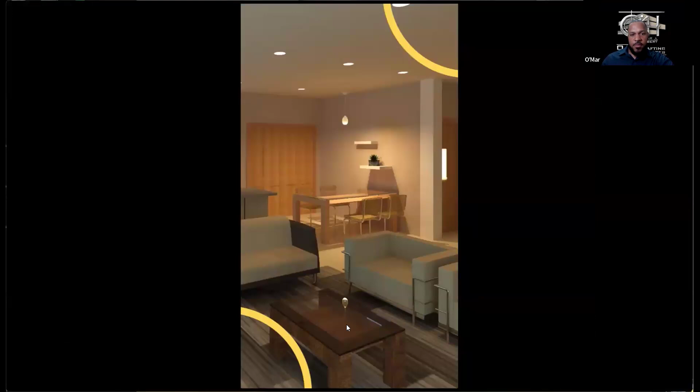All right, so I'm going to be bringing your vision to life the right way. Great design isn't just about looks. It's a carefully planned process that balances creativity, budget, and technical precision.

We start with the OAH checklist for successful building design, prioritizing your must-haves while ensuring your vision is practical. Sometimes dream designs need adjustments to fit the budget, but quality solutions are always possible.

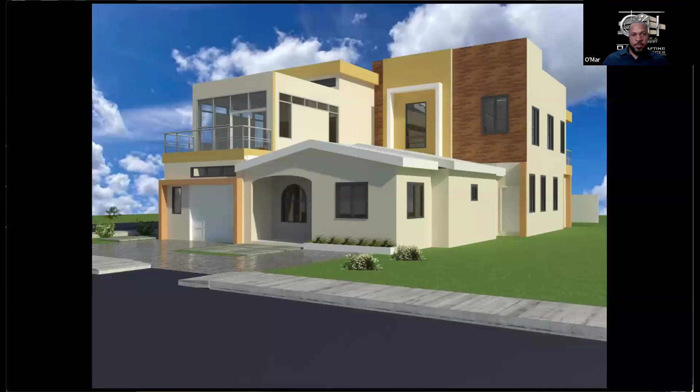A proper architectural plan isn't just a drawing. It's a detailed guide that contractors follow to build safely and efficiently. We consider structural integrity, climate resilience, and international standards, ensuring your house is both stunning and durable.

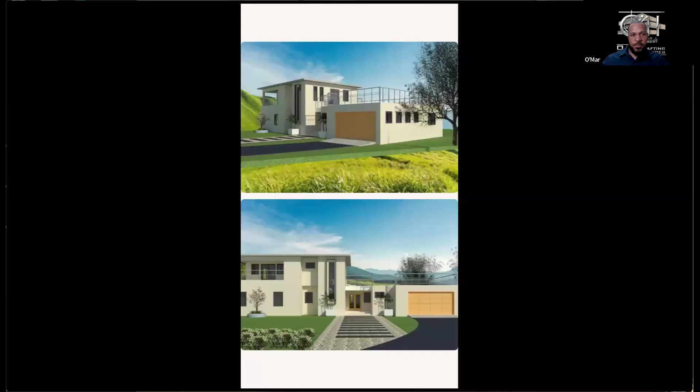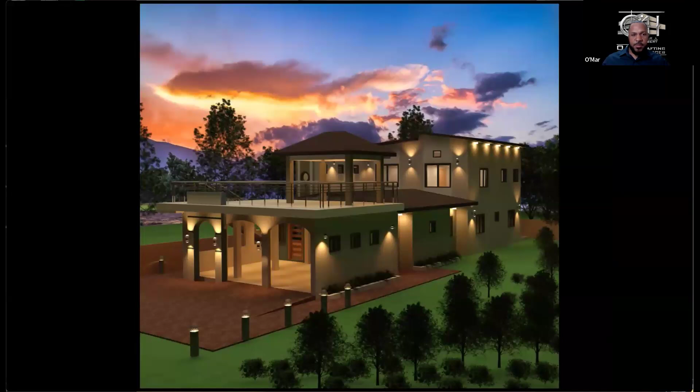This level of detail takes time, and for high-end custom designs, expect a higher investment, because quality, experience, and unique solutions come at a price. At the end of the day, our goal is simple: to design a space that works for you, functional, beautiful, and built to last, from vision to legacy.

All right, so that was a short video giving a synopsis of how projects are priced and the general process involved in getting this done. So at the moment, I'll be sharing my screen to go through previous projects that were designed and approved by the Municipal Council.

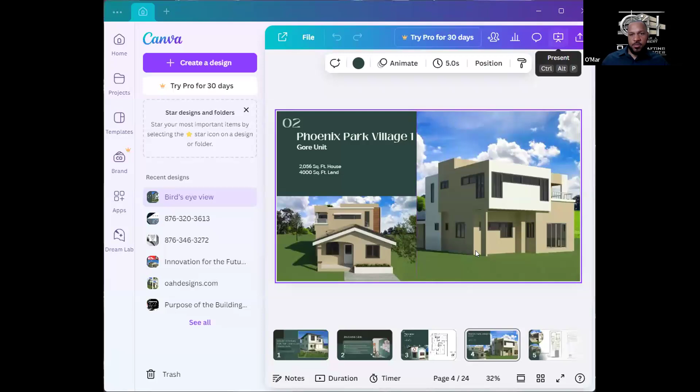House designs for the Jamaican landscape, Homebuyers Bootcamp 2025. So the introduction: we'll be looking at Jamaica's terrain types, flat land, significantly sloped or gently sloped, whether it's sloping upward or towards another direction.

So we will begin first with a starter design for various terrain types. We'll be showing small lots, and as we progress, greater lots, and show you how you can enlarge or expand on space, whether going up another floor to maximize space on a small land. We'll also show soil type requirements for special foundations and how to maximize small lots, and finally the rigor required for slope terrains.

So basically we will start with a very small lot. This lot is a Portmore Matalon unit, where the original unit is indicated in shaded lines. This client wanted an additional bedroom, living space, and dining. So a section of the building was initially added onto, with a few modifications in terms of exit and access to different rooms within the house.

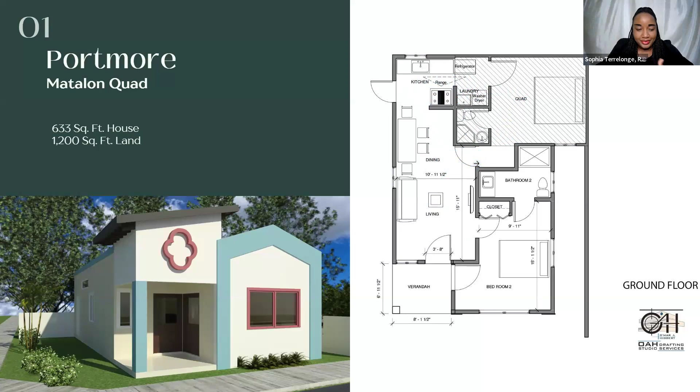I'll move on to the second of 8 projects. This project is in Phoenix Park Village 1, that's the original Phoenix Park there around by Dunbeholden in Portmore. It's a GORE unit, so the size of the addition amounts to 2,056 square feet, and the lot size is 4,000 square feet.

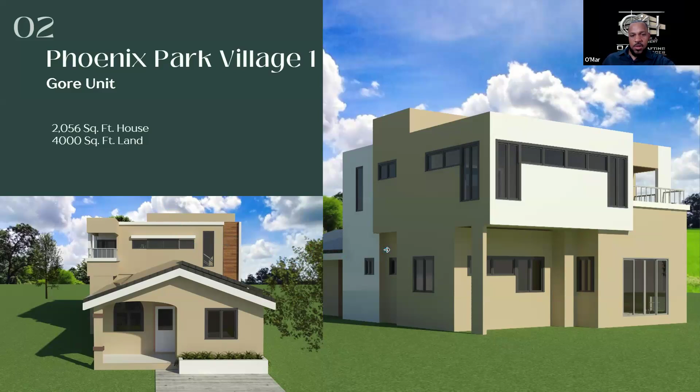This client wanted something different. They're not typical, they don't just go for any style because they just want to add - they want flair, they want a design, and they want comfort for a growing family. So with most designs, I recommend using a simple pattern, whether rectangular or square, and then slightly adjusting areas to bring a little flair to the appearance.

So this is the floor layout. The existing here is shaded. They did some modifications to the kitchen layout since they were adding the living space to the back.

As you enter into the dining area, they have a large kitchen with a dishwasher. Refrigerator is here, and the sink looks out through a window.

In terms of other modifications, this is basically what is existing on the bedroom side. The unit occupies 2 bedrooms, and the need for the addition required 2 bedrooms. So this is one of the 2.

Moving from here, we have the pantry. The pantry has a sink and cupboards along with counter and a tall standing cabinet. In this area that the cursor is indicating, they plan to put a deep freeze. So the spaces are allocated for expansion.

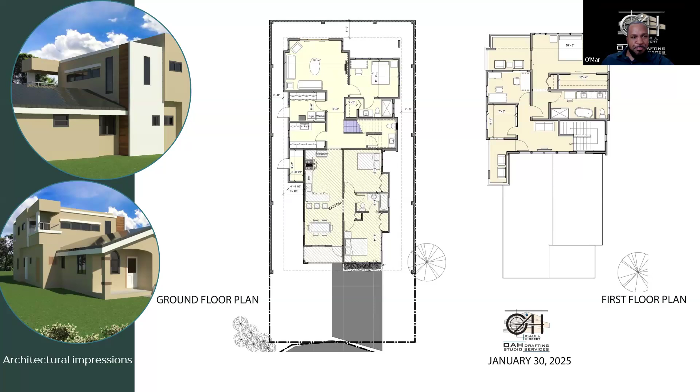Sure, no problem. So cladding is referred to as even the tiles, the wall tiles, or you see those materials that look like wood or they look like slate stone. Those are referred to as cladding. All right.

So this is another project. This was done from around 2022. This is the New Harbor Village, Old Harbor. And the size of the extension is 1,799 square feet. While the lot size, when I say the lot size, that's the land, the size of the property is 4,003 square feet.

So what was designed here is to have a trellis above the carport where 2 vehicles can park. And just to mention, the municipal council charges for every covered space. So if you're intending to use a trellis space, even if you're going to have it semi-open as this is, you will be charged for what is a semi-covered space. So this is the front appearance, the curb appeal.

Here's the use also again of cladding. And this cladding is to resemble shale stone. They wanted to also be able to access the top of their roof for entertaining. And for this kind of design to be done, the municipal council only requires a stairwell. So if the community standard is that it's 2 levels, as I know that most of these scheme developments are, the stipulation on the title would say that the building should only go up to 2 levels.

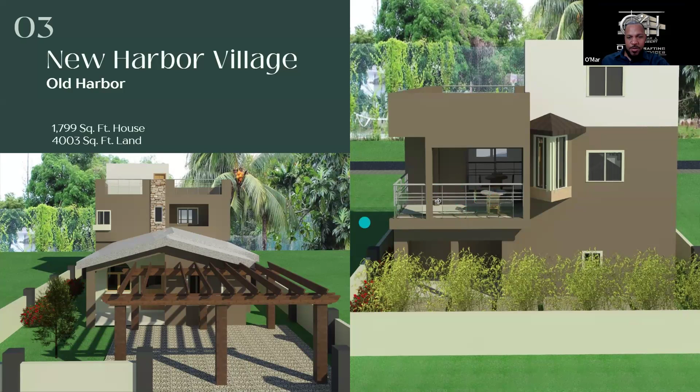So this is what the inside looks like. This is a concept of the kitchen space. They didn't want to entirely remove the wall because of structural integrity, and they didn't want to compromise that integrity. So small spaces were opened into the wall to allow them to see through to the front of the house.

Now let's go through the floor plan. So as usual, this is the existing section. And then the addition, they created an opening here for this bathroom from this bedroom. They have a young child who is going to school. So there was a desk in terms of spatial layout, desk and chair.

And we move into the kitchen. So the family loves to eat at home, and the female partner requested a large, comfortable kitchen for hosting. Now, next to the kitchen is a walk-in pantry, and then the laundry is next to that. So another idea that I repeat, where the cupboards are suited for a 3-member family. One here, and another one there. Laundry, tub here, washer, and dryer.

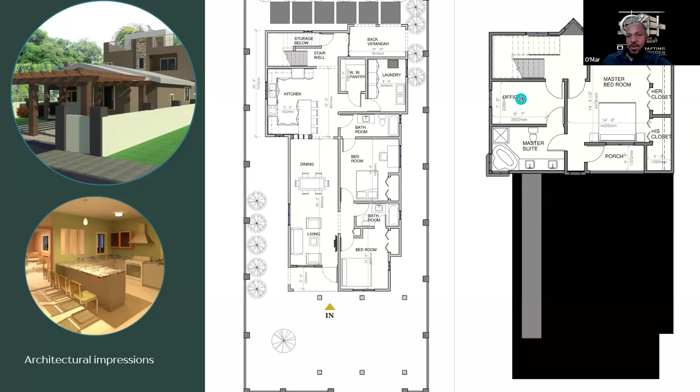All right. So I move on to the next project. So this project is in Mukiwaki Bull Bay. The design is built from scratch. There was no existing structure. So the structure is built from ground up, and the size of it is 2,172 square feet, and the land is about 10,000 square feet.

So this is near a beach, and because it's near to the beach, they wanted to have a beachish kind of vibe to the design, and you can see that simple lines are the idea of this design. Right. And they maximize on ventilation and light by using large windows and high ceiling. So this window you're looking at is a 4x4, which is a typical size window. And then on the top, these are 2x2, where all can be accessed or opened.

Do you remember the height of those walls? They're like 10 feet high? A little over 10 feet, around 10'6". Is there a special name for those windows at the top that go across almost the length of the wall? Well, these are your typical sliding or casement window. Okay. So you will slide it left or right. So they're fully functional? Yes, functional, operable. Yes, they can open.

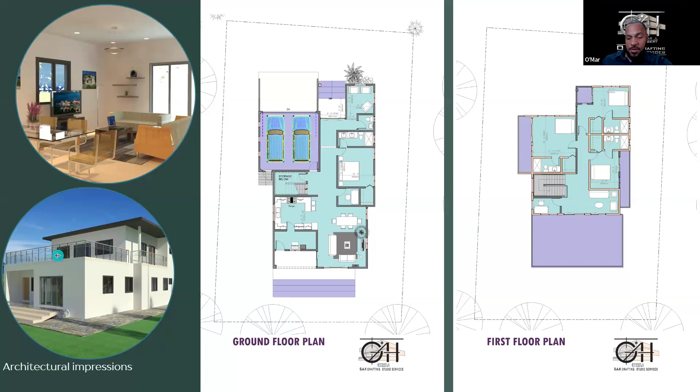One bedroom here, another here, and each have their own bathroom and balcony with a closet. That was the idea or the concept in this design. Each bedroom must have their own bathroom and closet with a balcony for looking out. And here is another lounge space, office, and large windows and a sliding door to look out, as you can see in this 3D render or architectural impression of what the final product can look like. So these are ideas that you can bear in mind when you're getting your design done.

So this project in Longville Park, May Pen, Clarendon has the level of the house higher than the road level and it slopes up onto the site. So with this design, steps were created to make an easy ascent into the property, and they intend to have a driveway which is open to the elements. And this was done because the space isn't all that big. They wanted room space more than to have a car taking up space, which possibly is not going to have any negative impact on it other than the sun.

So they asked for flares in the roof, different angles, and a large terrace for entertaining, as you can see here. So this is the lot. This line that goes around, that's the lot space. These are the steps that take you from the driveway or the road level up onto the property. So this is originally a 2-bed, single bathroom unit.

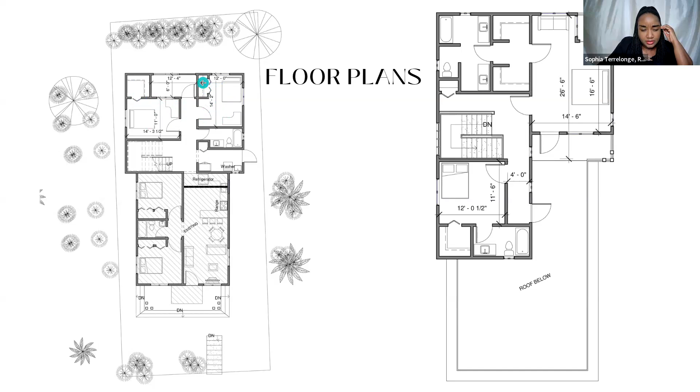So each bedroom has a study desk and chair, just to show the layout of the room. So this is a walk-in closet. The bedroom is 11 by 14, which is a typically good size. Same for here, this is a 14 by 12. Can an 11 by 14 hold a queen size? Yes, it can. Okay.

Bathroom that is shared between the two bedrooms and the back patio. Similar to one of the designs I mentioned, the entire space was intended to be for the heads of the house. But one of the children, actually the last child, wanted to be close to their parents. So a bedroom was added here.

So this is the bedroom, walk-in closet. As a child grows older, they would need their own space. Bathroom here with comfortable space for placing things on the counter. This is a passage that takes you onto the outside from the staircase or from the bedroom. And let's go to the master. Well, before I get there, this is a linen closet again for this bedroom. And then the master is 16'6" by 14'6", the space for the bedroom, 16 by 15.

So this couple wanted to have their own his and hers closet. Not a lot of space, but it works. This is about 8 feet by 5 feet going that direction. So upon entering into the private space, which I refer to as the closet and bathroom area, there is a passage that separates the walk-in closet from the bathroom. And you see here there are two vanities, one here and another one here. And there has to be space behind for comfortable use while you're at the vanity.

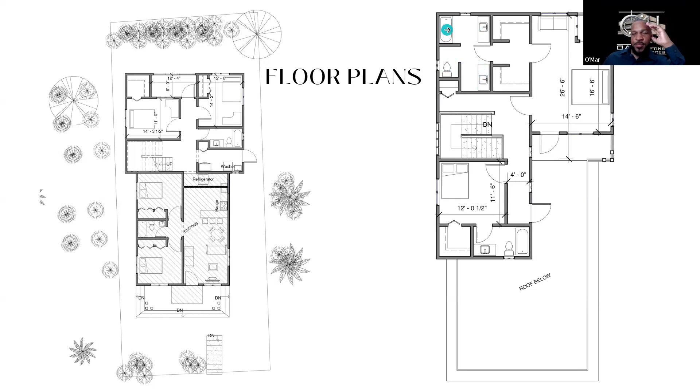And the toilet is somewhat private and separated, as most persons would aim to have. So the shower is here. This is a tub. They specially asked for a tub. They didn't want a shower, right? And again, all of this is a roof below or terrace where they can entertain.

All right, so this is another project. This is in Innswood. This land is flat. The size of the house is 1,615 square feet. The land is 4,751 square feet. An addition was previously done to the property and further modifications were required for a growing family and hosting guests. So just to bring up this idea based on this project, if you are purchasing a property and it was modified or sections were added on, you should ask your lawyer about that detail. Was there an addition done to the original property? This was a scheme unit and an addition was done.

So what happens in cases like this, when you go to the municipal council to submit the new design that you paid your architect or designer for, and the building officer does not have a record of the addition being paid for building approval, the penalty will fall in your hands. Oh, really? Yes, that's what happened with this client. Oh, wow. Okay. So the cost for doing a drawing is per square foot. However, the municipal council charges per square meter, which is a larger unit than square foot. That's just a standard all over the world.

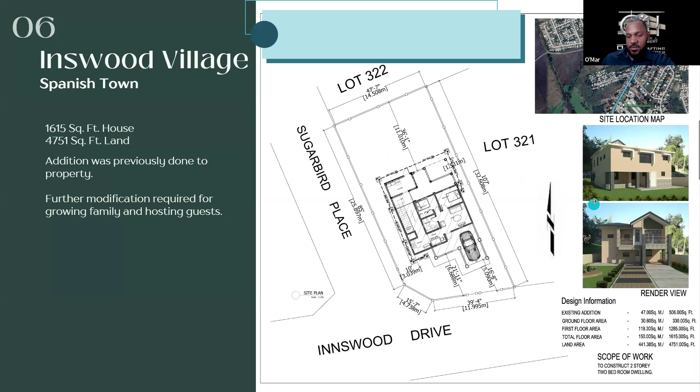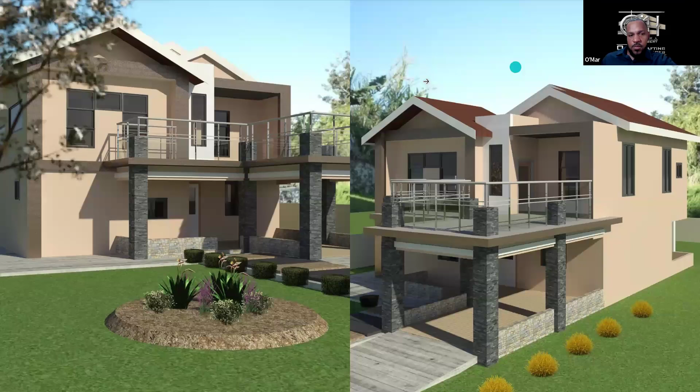Now this is what it looked like originally, but as mentioned in the short video, the concept can be changed, and depending on how far you are in the discussions, other things will have to come into play. And by that I mean, if the drawing was started, the construction document was started, and you wish to make changes at that late stage, there might be additional costs for going through.

Why did they change the design though? Was it because of the issue when they saw that the previous addition by the previous owner wasn't passed by the council? So they had to rework the design? No, actually, the reason that they changed, they weren't comfortable with the layout. Well, they liked it, but it was not communicated to me as a designer.

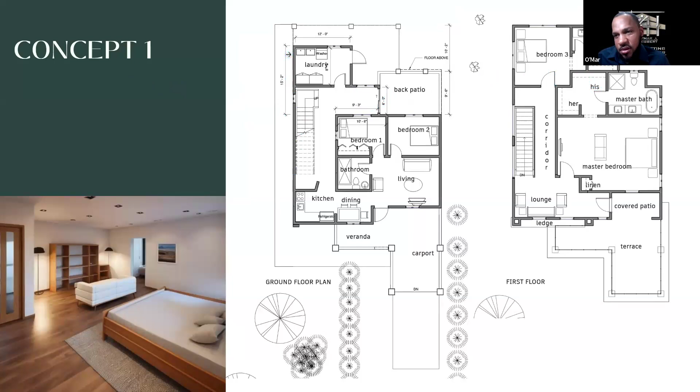So those windows, can they be opened? What's the name of them? Clerestory, okay. So this window doesn't open, it only allows light. Okay. Got it.

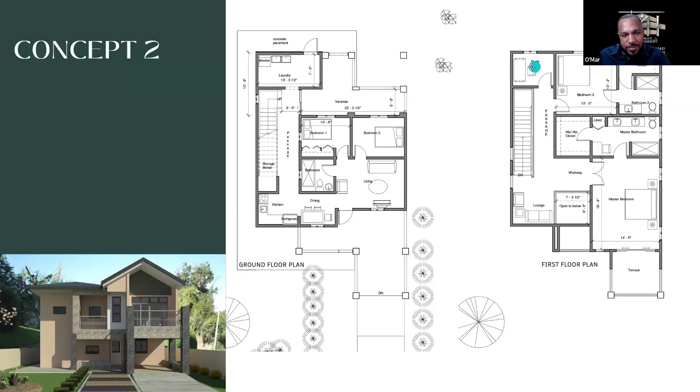And this is a concept view of what the bedroom can look like. Recessed lights, a lamp over the bed, a lamp at the bedside. Large windows here for allowing light to come in, because this projects a lot. So you don't want it to be dark. So you have to balance the amount of light that is admitted into the bedroom. So tall openings were used. These are sliding doors, and these are fixed windows on top. This, however, is fixed window at the top, fixed window at the bottom, and the middle one can be opened. And this is your typical sliding window.

Okay. So there are corner lots, and this is a concept that I came up with. The different use of material to bring flair and balance, earth tones. This is it for the architectural impressions. Now, I have one more after this. So this is number 7. This one was done in Yallahs, St. Thomas. And this was not a typical design, and I say that in terms of the soil type.

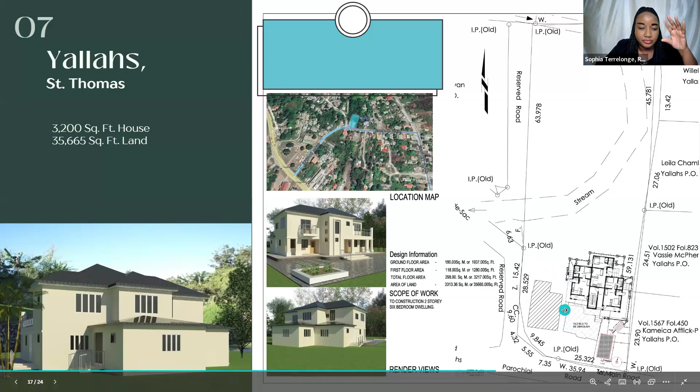Otherwise, it would have conflicting issues if that was not done, because there are 2 properties on the site, 2 separate properties. So what's the term... is that based on the requirement where you can only have a certain number of rooms on the property lot? Yes, so this is a subdivision, that's the term. So you have to subdivide, and then each lot will have its own space, requirement, and amenities.

So the client here wanted to have a multifamily unit, and that's one more reason why it was suggested to have a subdivision, because they're planning on having multi-family or multi-occupants on the ground level. So the ground level has a 1 bedroom, self-contained unit. The bathroom is here, closet here, laundry here that takes you out onto the back, kitchen here with island, and sitting space for watching television. They also have a veranda to the front, which is this you're looking at here.

So basically, the 3 units are almost the same size for these 2 — they are pretty much the same size. And then the one to the back is a little bit different. So they will enter their space up this area. They also have a veranda. Their kitchen is here.

For efficiency, I did the kitchen layout using the same design for all the units. So when this client goes to his cabinet maker, that cabinet maker will just make one design, one template, and 3 different production runs — 3 different projects, and they're all the same.

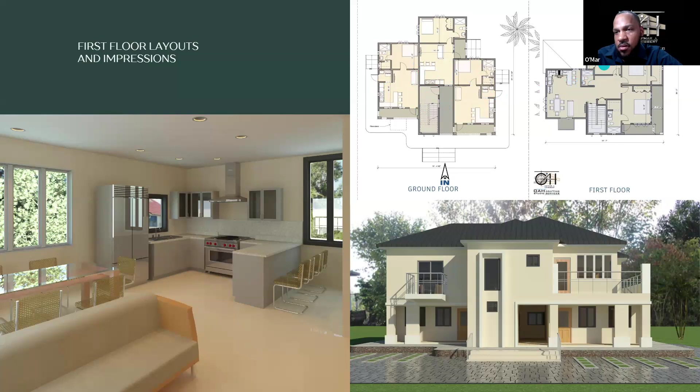So downstairs is for multi-family occupancy, and upstairs is where the family will live. They occupy 3 bedrooms — 1 here, and the other 2 to the front and side. So this stairs will take the case like you have 2 tenants downstairs and then the owners, the family, lives up top, yes.

So this is the dining area, large windows. Kitchen, as you can see in the concept here. Large windows again for light, and that window is here. A bathroom is here that is shared between the 2 bedrooms, and a linen closet here.

Some minor adjustments were made to the bedroom at the back. I believe I put up a patio, a 4x4 patio, and reduced the size of the closet.

So that's the reason for showing this particular design, to mention the type of soil. With this type of soil, the water table, as it's referred to, means that if you dig about 2 to 3 feet, you'll be seeing water in the soil. Because of the river running behind the property, this type of foundation is raised above ground level and compacted with a special material that does not allow water to permeate or soak through onto the floor.

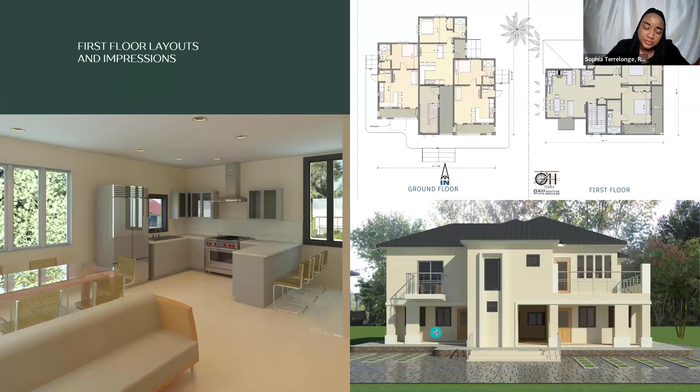And this is Yallahs, which is down close to St. Thomas coast. Yes, exactly — the water table there is high.

Now, because this person intends to host multiple families, it's a multi-family property, so parking is a must for the occupants. The standard is, if it's a single bedroom, you're expecting for a modern family at least 2 vehicles, minimum 1 in the worst case. But it can be assumed that at times you're going to need more parking space because of the number of persons who may drive, and also their visitors who may drive. So this houses 5 parking spaces.

Now, with a condition as this out in the rural areas of St. Thomas, where there isn't any NWC pipe or main sewer, a tertiary system, as the term mentions, is 3 different systems that complete the 1 sewage treatment. That's another story, but all of that area is cordoned off and separated from the main area.

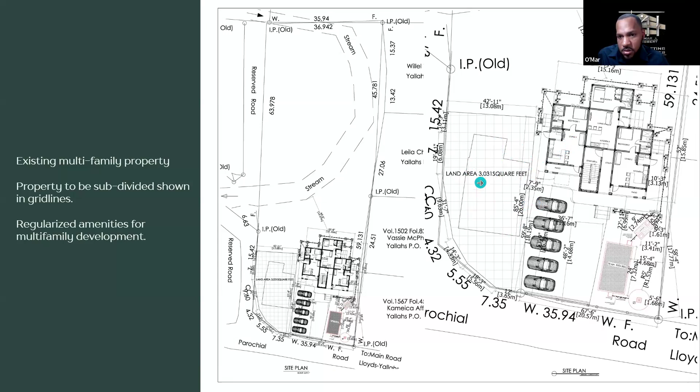So this is a blow up. Does the parish council allow for those 2 buildings to share the sewage facility, or does each one have to have their own sewage? Each has their own — yes, if you subdivide each lot, this lot has its own sewage treatment. And then for this property, the entire property has this 1 sewage treatment.

Okay, so this is what the foundation would look like for that type of soil. These are designed specially to accommodate that type of high water table in the soil.

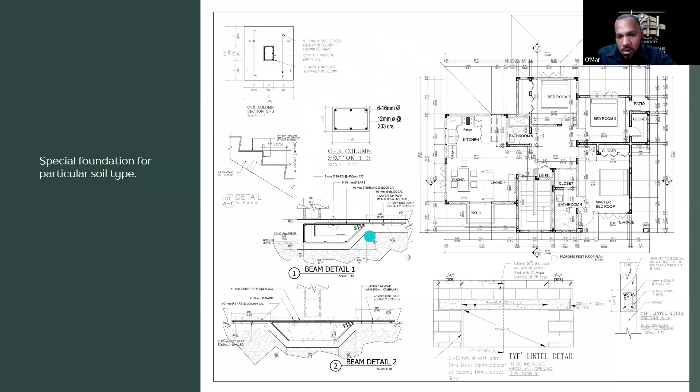So this is part of the construction document drawing, what the sheet looks like for building approval. This is the last one. So this lot is on the hill of Hellshire, Long Mountain. And this is pretty much a villa, so to speak.

Double car park on this area, on this part of the property. The client wants access from the front, and then for other occupants, they will park to the back.

So this that you're looking at is a surveyor's diagram. However, this one is special because the terrain or the slope of the land goes up and down, and in particular, this one slopes to the back. So basically, from here to approximately here, this is more than 3 meters in height.

So when you're standing at this area, on the original, before the modifications were done, you're seeing just the land. You're not seeing the road, you're not seeing the house that is beyond the street. So serious considerations were taken to control or prevent the soil from eroding by creating perimeter walls, special type of walls, not the typical block walls that you see retaining on your fence. Retaining walls, yes, and special foundations where piles or columns are placed strategically for structural stability.

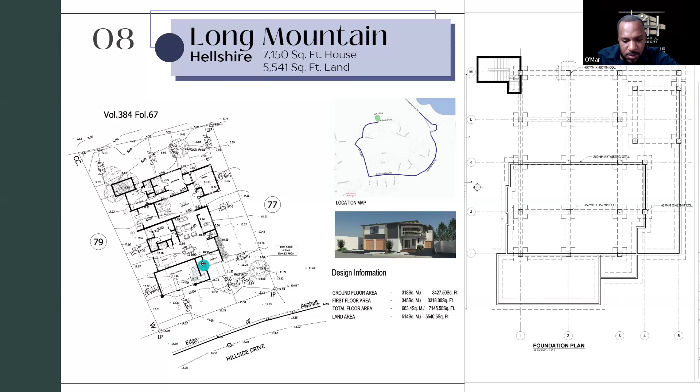So these are elevations. This is the front elevation with the double carport. The master bedroom is up here, and they have a small office here. Now, to get from this area to the next level, there is a staircase inside of the carport that goes up onto this level and takes you into the office space.

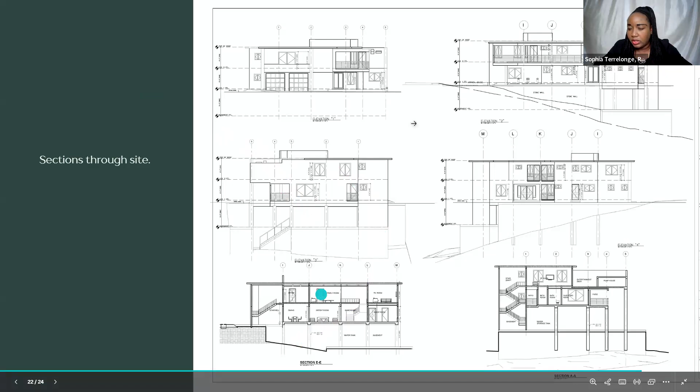In this design also is a pool. The pool is available for the occupants of the top level, and there is another room here which is permissible in this area where they can go up 3 levels. Rooftop pool? So the pool is on the 2nd level. And in this design, let's see if it's a split level. Yes, a split level. Okay, good. So the pool is here.

So this is a section, well, this was modified. This is a section cutting through here, and a portion of the pool is seen in this blue diagram. So there's nothing below the pool? Well, the pool has to have a specially designed flooring. It's actually 2 floors that are in that area.

Based on my experience, this engineer taught me to have 2 floors. So the pool will rest on one, and then in case of a worst case scenario, it begins to leak, it will not affect the level or room that is below. So they could drain the water and demolish the pool base, rebuild it without affecting the other room below. So it's 2 levels, 1 floor slab, there's actually a room beneath this pool.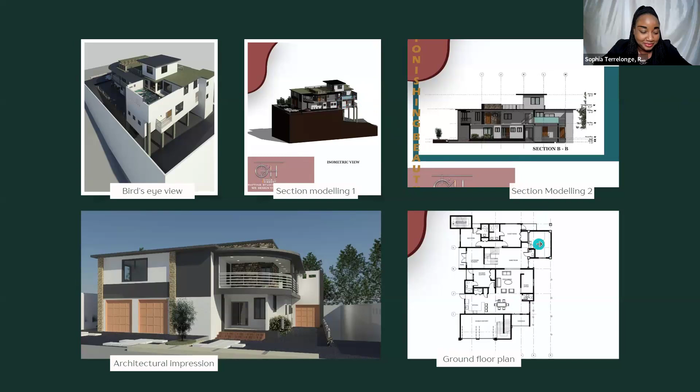That's correct, which is the library. Oh, the library. Yeah, those are treasured books, just in case. Well, it's a name. Some persons use a name just to get past, but that's another story.

So this is basically what it looks like at the front. Double carport, master bedroom, 20 feet by 20, with its own bathroom and closet.

This is the ground level, where there's a kitchen, dining, living space, study, powder room, and a bedroom with a closet, patio, own bathroom, and laundry here.

This area is a games area where they can place a large pool table. Going through the passage is a day bed, because a lot of breeze blows through the property. It also has a balcony here.

Another powder room here. To get into here, this is below the staircase - although it looks like one, the staircase actually starts here and goes up. So below the staircase is the entrance.

This bedroom has its own closet, balcony, and bathroom, a double vanity bathroom. This is the other bedroom, with a closet there, bathroom, and balcony.

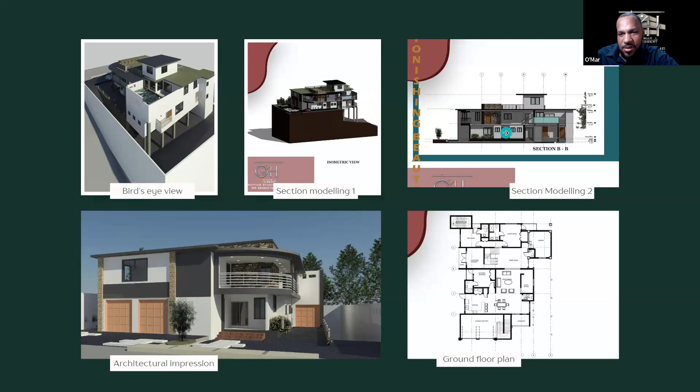All right, so that's the bird's eye view. That's a section of the model, another section, and an architectural impression of the front, and this is the ground floor plan.